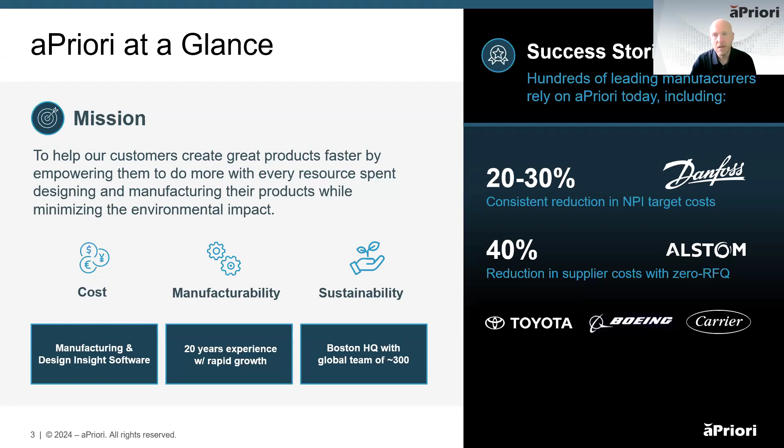Now, some of the top priorities in industrial manufacturing are where we can help as well. Inflation and margin pressure—we've felt it quite hard the last few years in terms of inflation globally, but margin pressure is still a big thing as well. That's something we can really help with by giving you a breakdown of where all the costs are coming from when it comes to your products.

Supply chain risk, obviously, with the geopolitical environment changing all the time, it can really lead to enhanced supply chain risk. So knowing where to look in different parts of the world—where is it profitable to do so, where is it reducing the risk—we can help with that kind of assessment as well.

Manufacturability skills are something that has been a concern for the industry for at least 15 years, really because 3D CAD is so easy to use these days. You can create any kind of shapes, not all of which are manufacturable. A recent study quoted in Forbes found that whilst the majority of students coming out of university and school are very well versed in 3D CAD, there's much fewer that are actually well prepared to make manufacturable design. So there's definitely a skills gap there, and our design guidance can help close that gap.

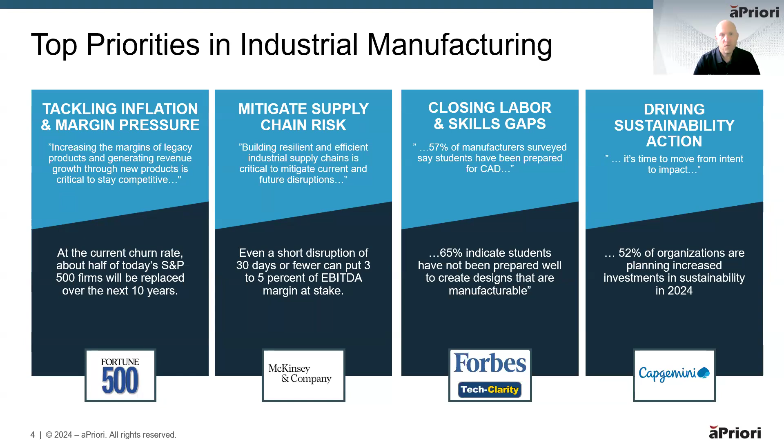So we kind of tackle all four of those top priorities, and the way we do it is by leveraging the investments you've already made in digital twin technology. A lot of companies have done a pretty nice job focusing on the digital twin of the product. The 3D CAD model is the basis, adding PMI and other metadata, storing it in the PLM system. It's the start of a digital thread. We might use that for some digital prototyping as well, using FEA and CFD and those things.

But where aPriori comes in, it's adjacent to simulation technology, but it's simulating the manufacturing process, and unlike other simulation technologies, we do it in seconds and minutes rather than hours and days. We really bring the digital twin of the manufacturing process within a manufacturing facility. So we bring two digital twins and run the digital twin of the product through the process twin and the factory twin. By doing that, the insights you get are the cost, the time to manufacture it, any potential manufacturability issues, but also the amount of carbon emissions as a result of those processes, all the way back to the raw material. So it can really help with your upstream scope 3 reporting requirements.

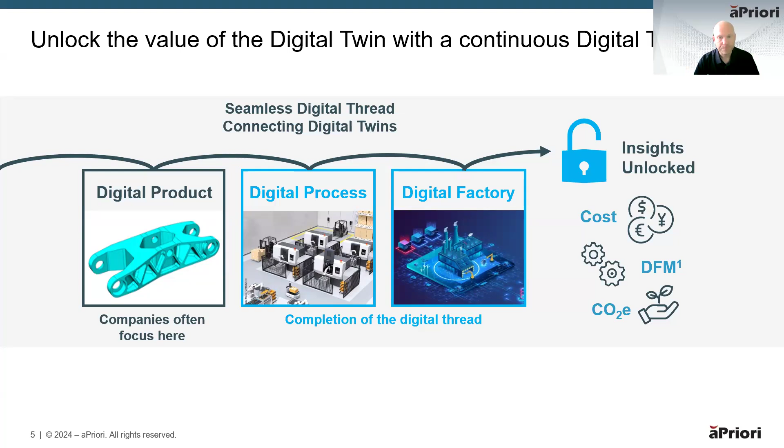So today we're going to be looking at the importance of sustainability when it comes to design and incorporating that, and some of the challenges. Then looking at how you can look to balance cost and carbon, because they're two very different units, really.

You know, how much is a kilogram of carbon emissions? What's the damage? What's the increase in risk to your business? What are the potential tax implications? How is it going to harm your bottom line? A customer is going to be put off by emitting extra carbon emissions than what you really need to. All these things come into the equation. So balancing cost and carbon is really a critical one to consider.

And then we've got a bunch of sustainable design case studies, and these can be really insightful - just some of the things you can start to play around with, some of the levers you can pull in order to improve the sustainability and the profitability of every design that you make. Being able to do that early during the design process is where it's most valuable. And then we'll summarize today's session.

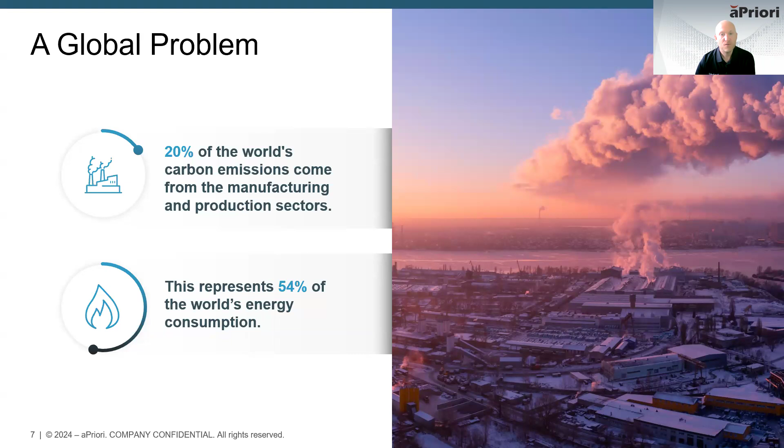So as we all know, it's really a global problem, climate change. 20% of the world's carbon emissions come from manufacturing and production sectors, and also 54% of the world's energy consumption. So manufacturers, our customers, are very much responsible for some of the climate change issue, but we also offer part of the solution as well. Engineers are going to be the ones that solve this issue, if we ever do, and I'm hopeful that we are.

So some of the challenges around design and sustainable design is really the lack of knowledge. If you look at two designs, intuitively you can probably say this one is more expensive than this one because maybe it looks more complex or the quality is better - you've got a good indication of what's more expensive usually, kind of intuitively. But if I was to show you two designs, it would be very difficult for you to kind of guess intuitively which one has a higher embodied carbon in it.

Then when it comes to business models, we're really focused on profitability as a business, and usually the way to increase profitability, increase revenue, is to sell more. Now, selling more doesn't necessarily mean that your carbon emissions are going to be less - usually it's the other way around. So our business models don't really work too well for sustainability. So we need to kind of look at balancing the books in a different way.

Then when it comes to the sustainability team, they're really focused on the reporting, making sure that everything that's been done is accounted for, much like a finance team. When it comes to design, they're not really too focused on the design and manufacturing phase. For the majority of people, the biggest environmental impact is when the product is being used. If the product uses any kind of energy during its lifetime, that is going to be the biggest proportion, and that's usually where the sustainability team want to focus, because that's where you start on the biggest area.

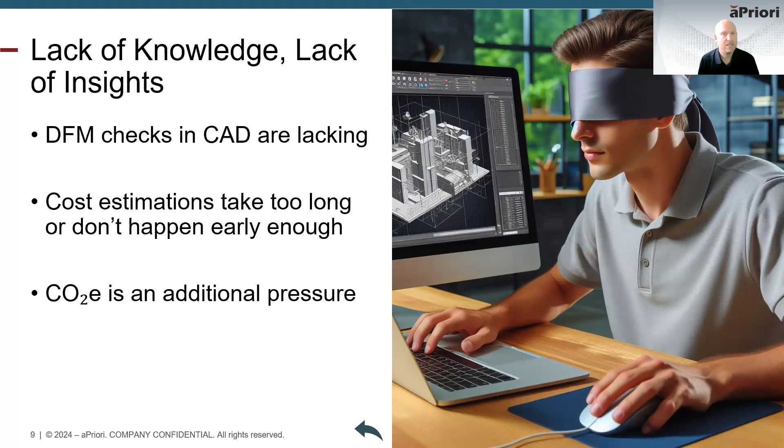So when it comes to business models, one thing we can do to address the balance is to apply an internal cost of carbon. Now, I spoke about this last week in the sustainable sourcing section, but if you are to quantify the cost of carbon by applying an internal carbon price, like many of the top 500 companies are doing, everything else kind of falls into line.

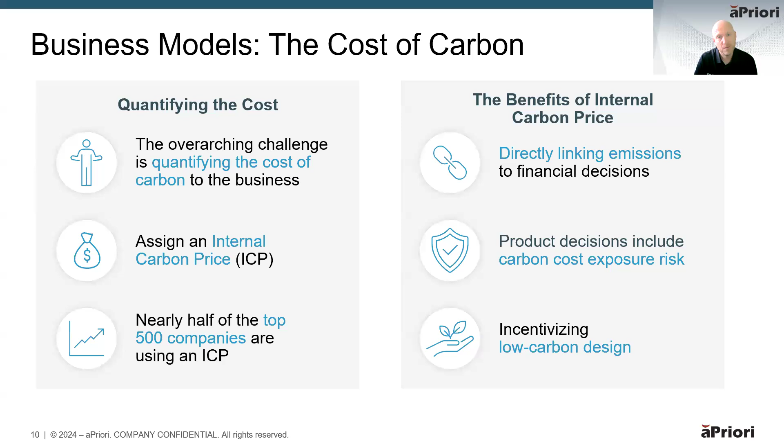What you're going to want, if you've got a cost of carbon, is a really accurate idea of how much carbon emissions you're putting out. And so you're going to want more insights, more accurate measurements. You're just going to really treat it as a cost that's potentially leaking out of the business. So if you do nothing else, just applying that internal cost of carbon and internal carbon price, that's going to give you a really good strategy for going forwards, because now everyone is just chasing cost, rather than how do we deal with carbon and cost separately or together.

And all of those things are really reliant on the customer, how the product's used, and having that closed loop to get the product back. That's definitely the hardest area to do anything about. The other thing is the in-use phase. If it's an electrified product, you've already kind of decarbonized it as much as possible if you've moved away from fossil fuels. So if you've gone to a synthetic fuel or a low carbon method of powering the product, you can kind of rely on the natural energy transition of the grid.

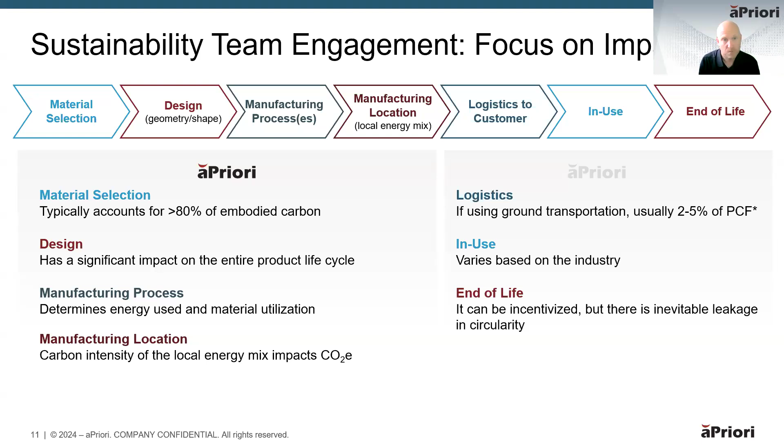They won't get bigger, but they'll be more significant as a whole. And what we found by talking to customers is there's really four levels of maturity. So the first place to start is creating a baseline. You need something to measure against.

A lot of customers choose where they were in 2019 and try to measure the products and corporate sustainability from that year, and they use that as a baseline. And they'll try to make any announcements based on that baseline. So if they're looking to halve their emissions, they'll do it based on that baseline figure. If they're looking to reach net zero, it'll be based on that figure.

Then the next place to start is sustainable sourcing, because you're not really having to change the design of the products. You're not having to change any real specifications. You can just look at a more sustainable supplier, one that uses more renewable energy, one that's in a lower carbon energy part of the world, like the Nordics, for instance. They use a lot of wind power, or Brazil, they use a lot of hydroelectricity. So anywhere that uses kind of lower carbon energy generation is a potential route to look for.

Then I call it sustainable cost engineering. It could be value engineering or just re-engineering, but taking an existing product and making it more sustainable. So looking at whether you can source some more recycled content. So when it comes to aluminium and steel, there's no real loss of performance with those materials when they're a higher recycled content. They're really 100% recyclable without any loss of performance. So swapping to a greener grade of those materials is quite an easy thing to do.

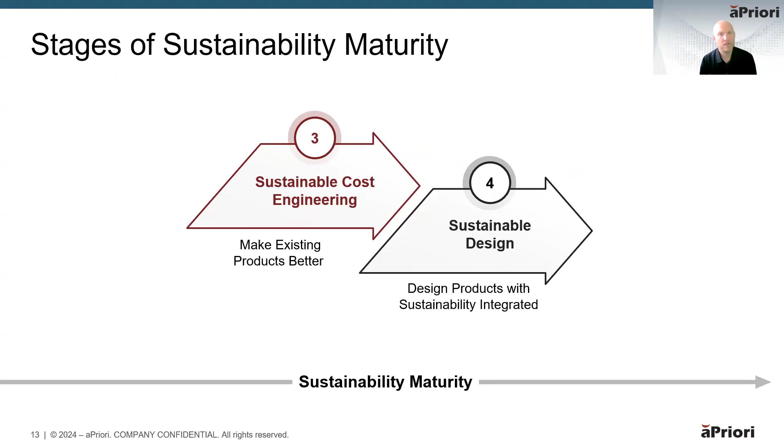And the most mature companies are really considering sustainability from the get-go, from design, and they're really considering everything else along the whole chain. So in terms of maturity, really starting at the end and working backwards. So today we're going to look at the more mature phases. So in last week's session, we looked at the first couple of stages. We're going to focus on tweaking existing products and starting from scratch.

And to do this, we're using the aPriori Manufacturing Insights platform. And what we do is take the 3D CAD model, we'll run it through a digital factory. That's really the only input that you need to make as a user. We run some automated analysis through our artificial intelligence engine and give you insights to review. And those insights allow you to take action on exactly what you need to take action on based on your requirements. So getting insights into the sustainability, profitability, and the manufacturability of that product gives you a really insightful position to make decisions around.

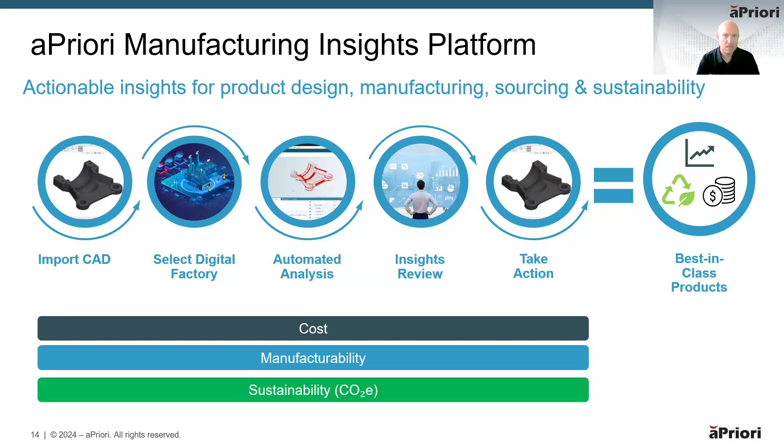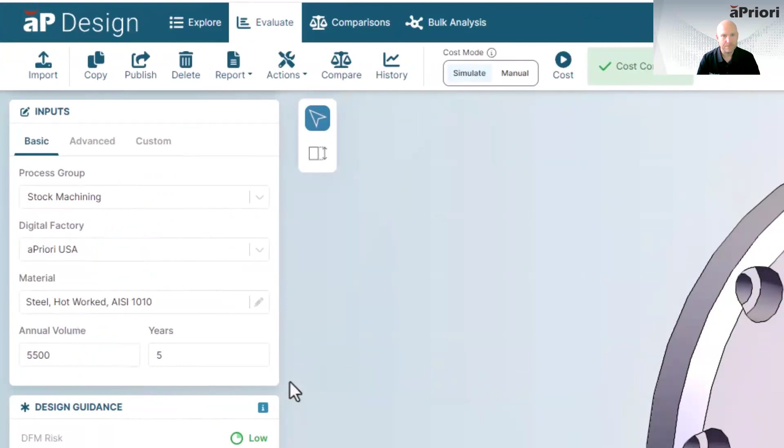If you are looking to join the rapidly expanding number of leading manufacturers using aPriori to improve their product profitability, sustainability, and manufacturability, you start by simply uploading your 3D CAD model into the Manufacturing Insights platform. After choosing from a list of manufacturing process groups, a digital factory, and an annual volume for production, you are ready to get insights into cost, carbon, and DFM. In seconds after a full manufacturing simulation, we get design guidance based on a combination of best practices and the specific capabilities of manufacturing facilities. This allows the design to be right the first time, accelerating your time to market, and reducing the back and forth so often required with suppliers.

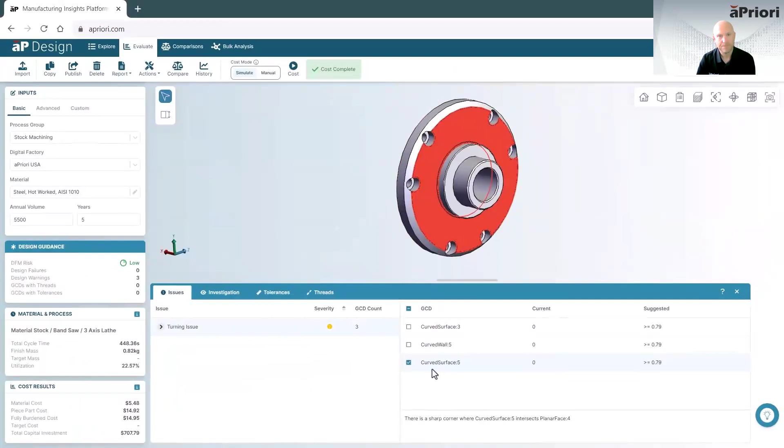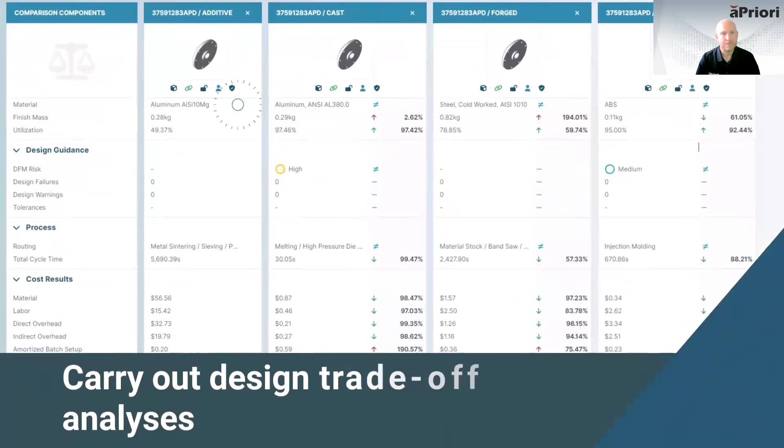We can also dive deeper and look at the time and cost of each operation, as well as a full breakdown of fully burdened cost, which can be used to drive further reductions during design or leveraged for fact-based negotiations downstream. We can then start to make data-driven decisions earlier in design by comparing different scenarios, altering the design, the material, the manufacturing process, or the chosen supplier or region. We can then take this to the next level of automation by leveraging aPriori's bulk analysis and upload a complete project of 3D CAD assemblies. Or go fully automated and integrate manufacturing insights into your PLM system.

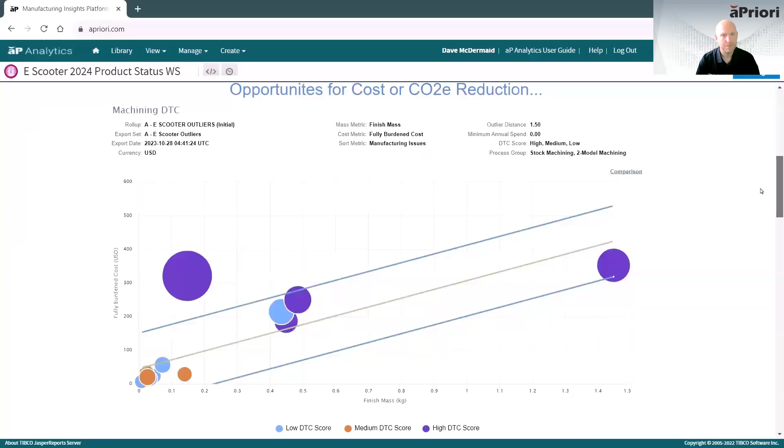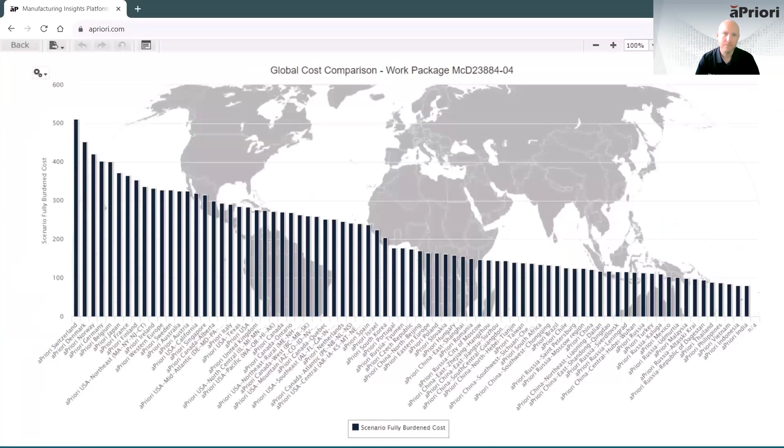Everything evaluated on the Manufacturing Insights platform can be viewed from a much higher level too. Using the inbuilt analytics, we can build dashboards and reports to help us identify opportunities for innovation, applying precious resources on the most impactful areas, reducing risks and focusing efforts. Or use the data for strategic sourcing decisions. On top of all that, scenarios can be shared with key project stakeholders, enabling in-context collaboration with full traceability. Removing the need to schedule time for experts to review designs, getting more profitable, sustainable, manufacturable designs to market faster than ever before.

So that's how it works. And it is a platform. So it's not just for one group of users. It's not just for a single silo. It can really be used across the product development cycle. So you can use it in one area, but it's really most powerful when you use it along the whole process.

So design engineers have a view. They can do things earlier on, start to make some reductions. Then it can go to a value engineer and they can take the data that's been generated from the design engineer and refine it, look at things to a much deeper level and do a really nice job of optimizing the manufacturing process.

Program managers can view the analytics from a high level and look at where to focus and look where the risks are and where the opportunities are. And then anybody else that has an influence or is a stakeholder in the product can review what's going on between all of those teams and make comments, all in context of 3D with those insights.

So we have a name for each kind of area. AP Design is what the designers use. AP Pro is what our experts use. AP Workspace is the collaboration tool. And AP Analytics is our business intelligence platform for creating dashboards and tracking products against cost and carbon. And then AP Generate is what links it to your PLM system.

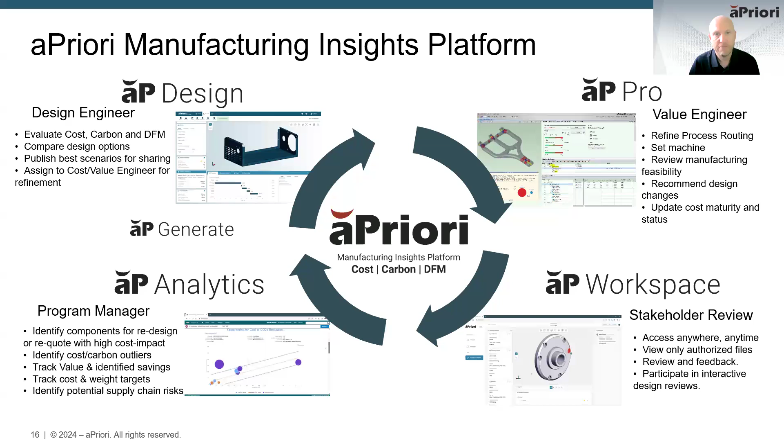Now, the product development process, we've probably all seen this before, but the earlier you start to make design changes, the more design freedom you have, the more options you've got available to you, and the lower the cost is. So as things progress to the right, the cost of any changes goes up, and you've also got less design freedom as well. So the blue line is the design freedom going down.

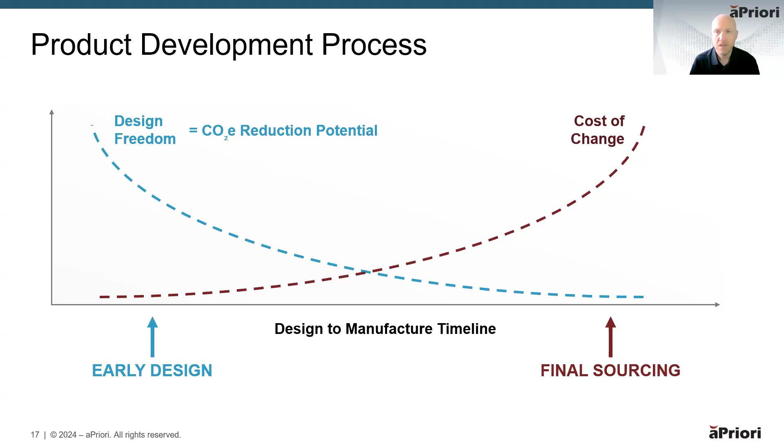That's also the same as carbon equivalent emission reduction potential. So those two things decrease in terms of opportunities, whilst the cost of any changes goes up. So we really want to make changes as early on as possible. So today's session is all about balancing cost and carbon. So what levers can we pull there?

So we've kind of touched on a few of them already, but it's everything the designer and product development team has influence over. So it's the geometry, it's the shape, it's the material, the manufacturing process, and potentially the location and the energy mix that's being used in that location.

So what I want to do is just run through a series of scenarios to show you what aPriori came up with, but also how every case is really different, and you can't really apply one rule for every single case. And we're going to make it a little bit interactive as well. So this scenario is part of a train. It's a customer example, and this is kind of one of their demonstration pieces. It's a welded assembly, so lots of sheet metal, formed sheet metal, then welded together into an assembly.

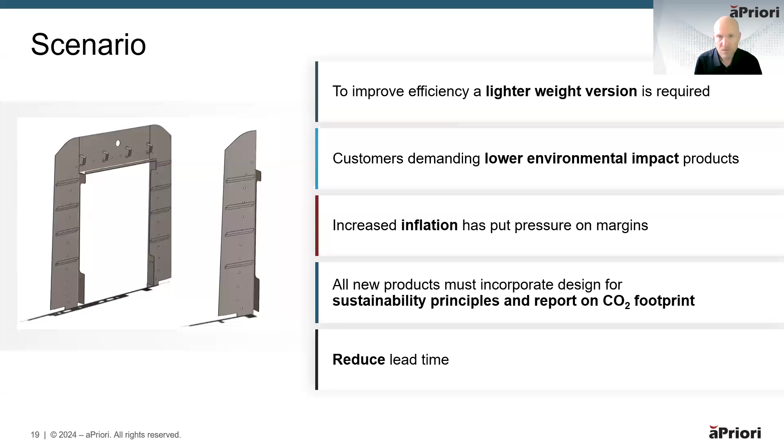And the scenario they gave us was to come up with a lighter weight version with lower environmental impact, potentially lower cost as well. And if you can, reduce the lead time. We don't want it to take longer to manufacture. So we looked at it and thought, oh, we can probably do some part consolidation on this. That was my design head going. So can we do it in one piece, simplify it a little bit? It might be less parts, but it could be more complex. So which do you think is going to be the lowest cost?

And this is when we're going to launch a poll question. So I've got two questions. What is going to be the lowest cost, and what is going to be the lowest carbon? So if we can launch those poll questions, out of the two, we've got left-hand side and right-hand side. So the one on the left is the assembly, the one on the right is the single part version. So Dennis, can you launch the poll?

Perfect, thank you. So which will be the lowest cost and which will be the lowest carbon? I just want to get an idea just to see how intuitive that kind of a question is. So if you were presented with these, imagine you're a design manager, you're being shown these two designs, you know the requirements are less cost, less carbon. Which one are you going to go for?

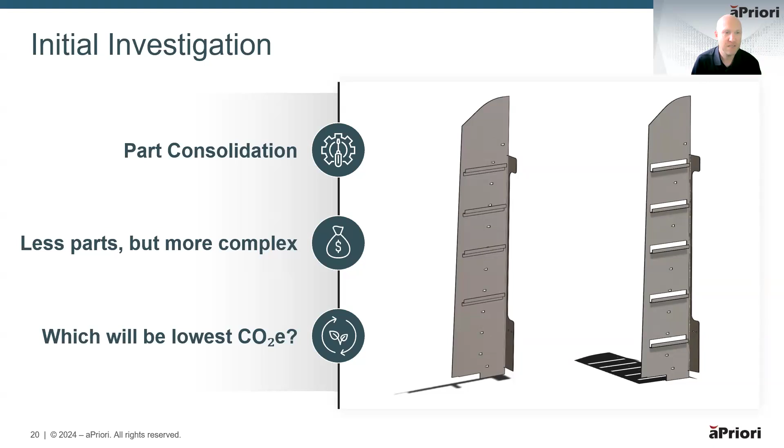And when we've got a few answers, we can take a look at the results. Okay, so both coming out with the single part on top, although a few people choosing the welded assembly as the lowest cost. So let's take a look. Thanks for launching that, Dennis. So this is exactly what we can find out.

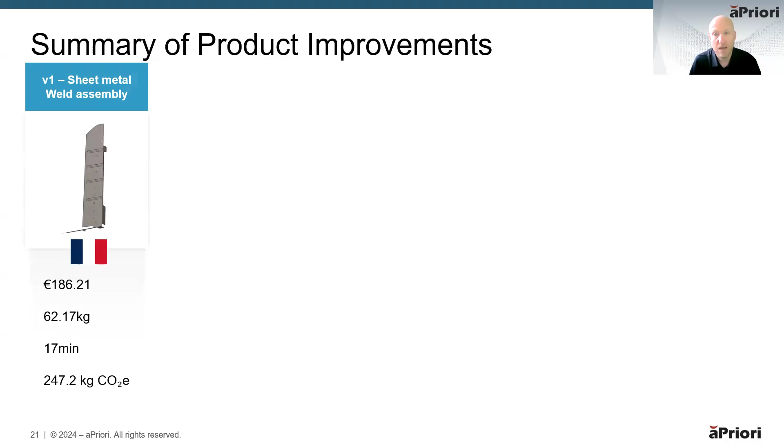So our baseline was our sheet metal welded assembly, and it came in around 186 euros, manufactured in France. The weight was 62 kilograms, and it took about 17 minutes to manufacture. So the welding and everything took about 17 minutes, and the carbon emissions was 247 kilograms for that one piece, or for that assembly. So the single part version came in at 161 euros.

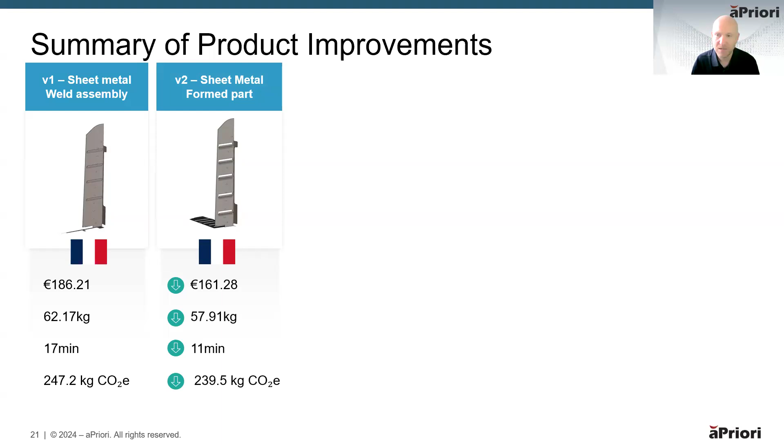So we made a saving there. We made a saving on the weight too. And it also brought the time down and the carbon. So if you said both carbon and cost were lower, you were correct. So then you can look a bit further.

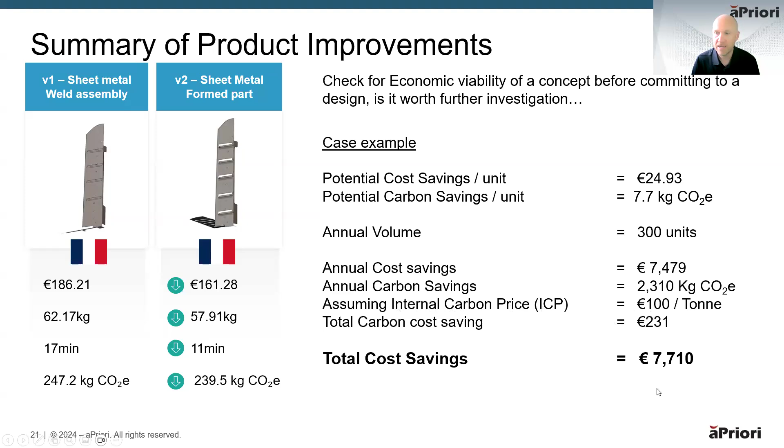We can look at the total cost savings if we were to roll this up into an annual amount. And just this one assembly consolidated into a part would save, based on an annual volume of just 300 units, around 7,000 euros. So pretty significant figure. And for our internal carbon price, we've got 100 euros per ton of carbon emissions, and that gets rolled into the cost savings.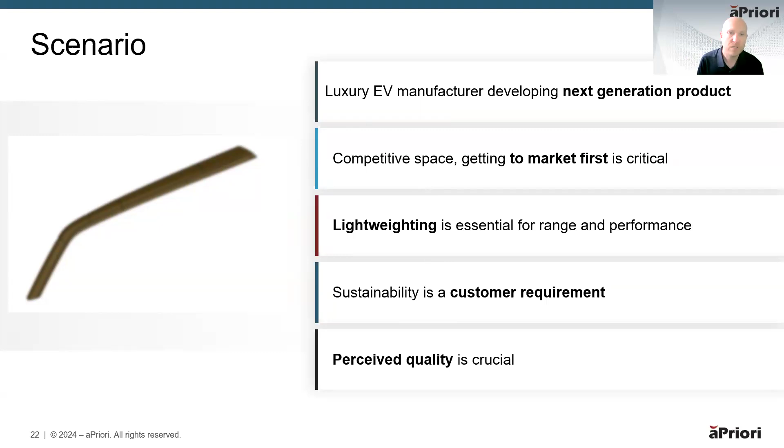So here's another question for you all. So we've gone from assembly to single part. We're going to do the opposite way around. So this is an automotive example. It's blurred out because it's a customer part. It's an EV manufacturer, similar kind of constraints really. Lightweighting is essential, but sustainability is also a customer requirement, and perceived quality is something we want to make sure we've got as well.

So this time we're going the other way. We're looking at splitting this part into more than one piece, because this is about 3 meters long. So it's a very long piece of trim. It's injection molded, so you're going to need a big machine. So if we create it out of more parts, but smaller parts, which one's going to be the lowest cost and which one's going to be the lowest carbon?

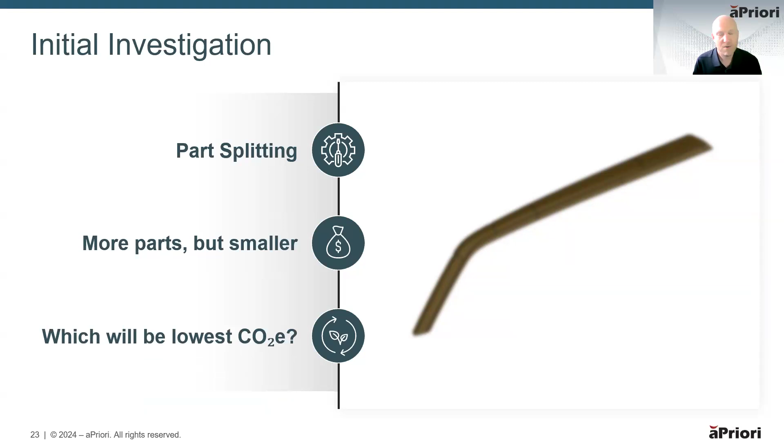However, it gets more complex here because it's not just one piece or two piece. We can cut this into as many pieces as we want. So if we can launch the second poll, we've got a few more options to choose from. Do we want to make this in 2 parts, 3 parts, 4 parts, or one big part? So we've got a lot more to consider, for both cost and carbon. So if you could just launch this second poll question there, Dennis, and we'll see what people's response is to that one.

So the last one was fairly simple, but as we progress, we're becoming more realistic with our design challenges. We have more options available to us as a designer and manufacturer. So we've got more freedom to do things, and it definitely makes the decision making more critical, but also more complex. So let's see what the result is here.

Wonder if any of you are abstaining from voting because it's too complex.

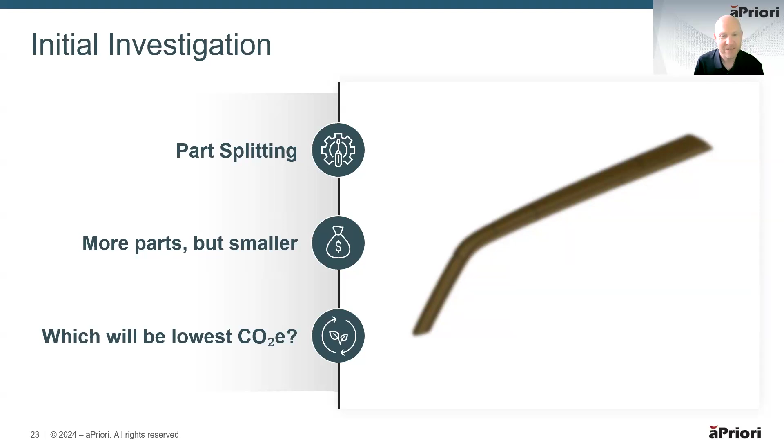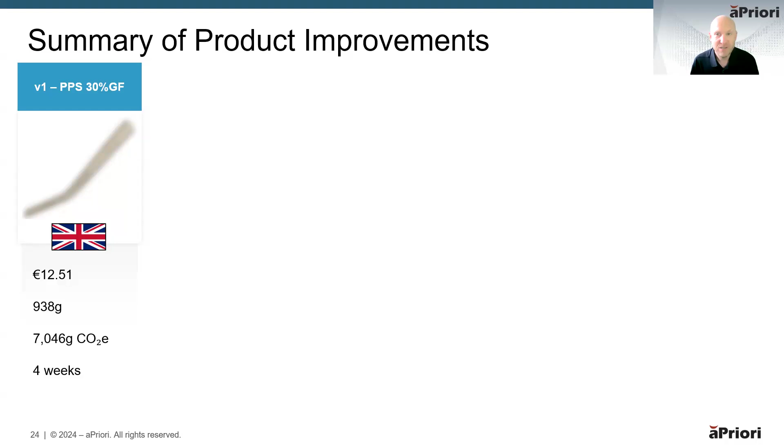So we did do it for all of the versions, but I don't have the answers for all of the versions. But the first one, it was a 30% glass-filled polymer. The 3-meter version was 12 euros 51, came in just under a kilogram, and 7 kilos of carbon emissions. And it took about 4 weeks, manufactured in the UK. So we tried 2 pieces, 3 pieces, 4 pieces. The best option was 3 pieces.

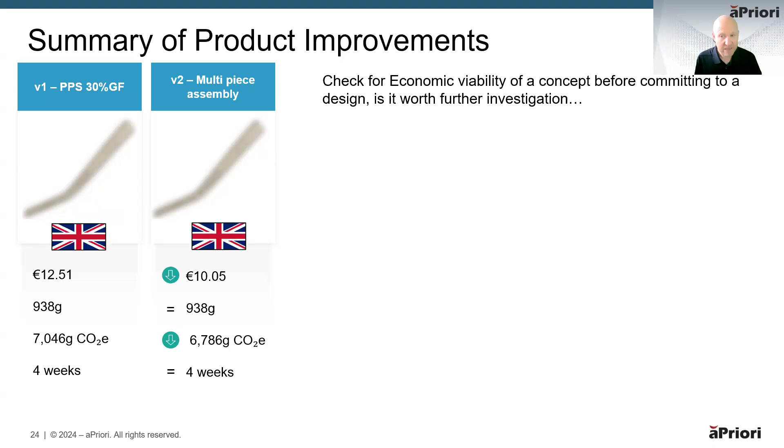And the reason for that is there are not many machines that can take a 3-meter long part. So the clamp force of the machine went up, and therefore it was a much bigger machine, and the energy use during that injection molding process went up as well. So by splitting it into 3, we can do a multi-cavity tool and get it on a much lower clamp force and get everything done at the same time. So the weight is the same because we just split it into pieces, but we made a fairly significant saving based on the volume.

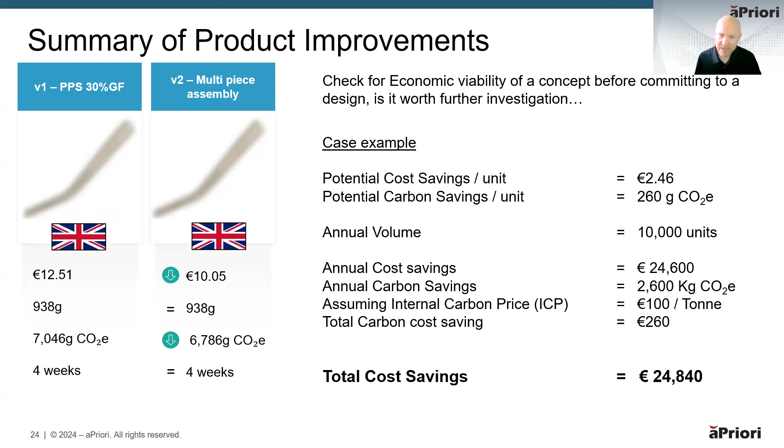So assuming 10,000 units of the whole thing, we saved 24,000 euros. So you can see part consolidation is not always the answer. Splitting parts is not always the answer. So the next scenario really gives us a different approach altogether.

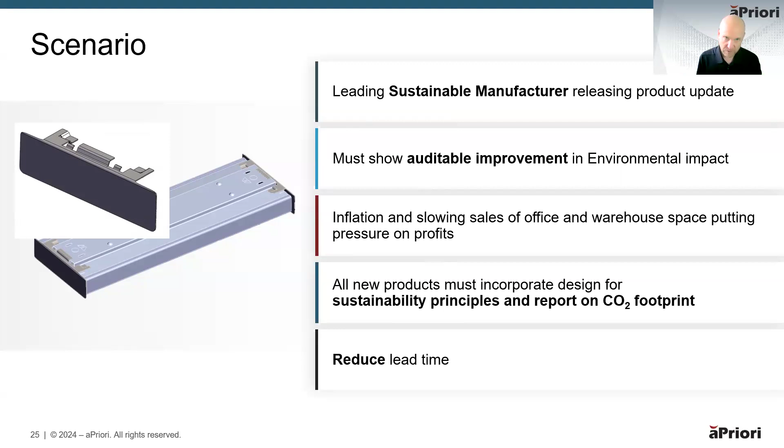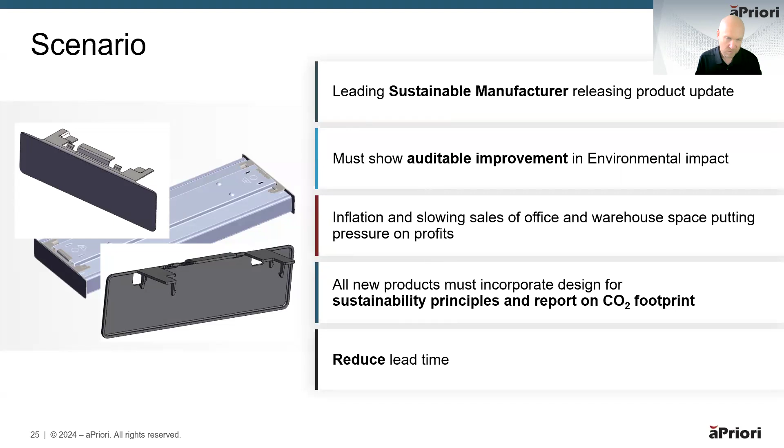So we redesigned it as a plastic injection molded version. So we tried to do a 2-piece tool design with some clips in there. We probably need to make it quite a springy polymer to make it somewhat similar to the sheet metal version. So I haven't asked any questions on this one because it's a bit more complex and we've got a few more options to run through.

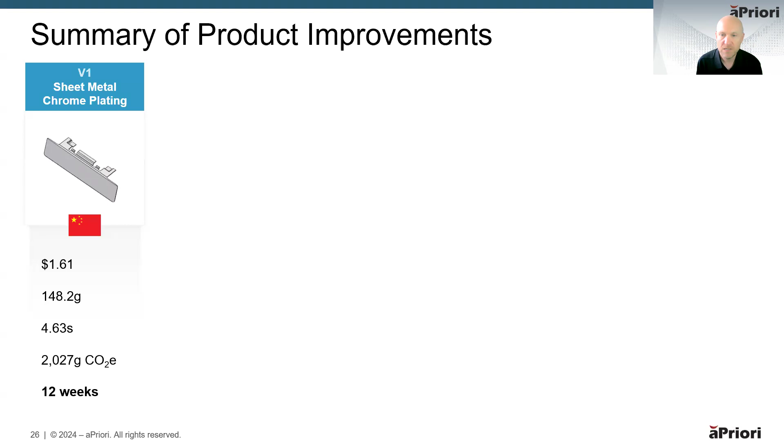So we started out with a sheet metal version with some chrome plating on there because it's a decorative piece. It's going to be on someone's ceiling. We want it to look nice. We were getting it made in China at a cost of around $1.61. The weight we don't really care too much about because it's just sat on someone's ceiling, but it took 4.63 seconds to manufacture and 2 kilograms of carbon.

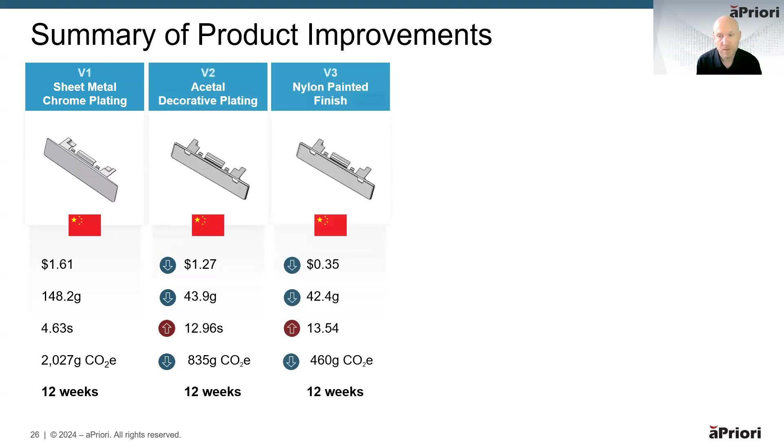Changing that to an acetal with chrome plating on did reduce the cost, but the time to produce them went up. So the injection molding process for 1 at a time went up compared to the sheet metal process. Then we tried a nylon. Now the nylon brought the price down. Bear with me 1 second, it's animating by itself.

Nylon brought the cost down and the carbon down, but the thing was, we would have to paint to get the finish that we were after, because you can't chrome plate nylon, and that's something that aPriori actually flagged for us. It said it wouldn't be compatible because of the material. So the time went up slightly, but everything else came down. But the fact we would have to paint it meant we kind of scratched that off the list.

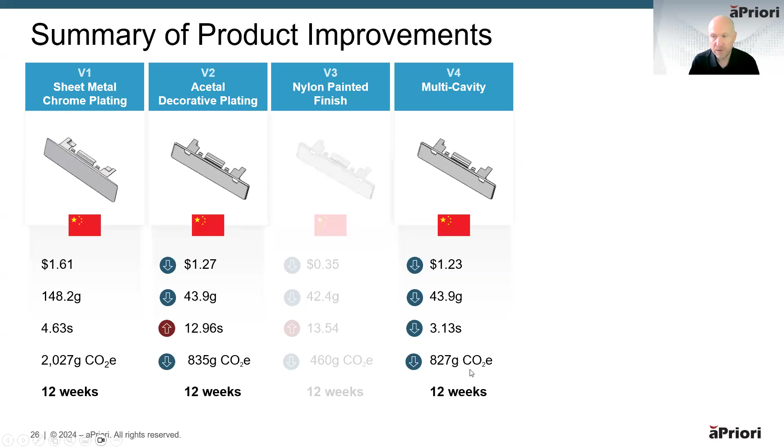So the other option to get the time down is to look at a multi-cavity tool. So if we were to put 4 in at the same time, we can actually get the time down by 4 equivalent, because it will still take 12.96 seconds, but because we're making 4 at a time, the equivalent is 3 per part. That's going to bring our carbon emissions down further per part, and then we can look at different regions to actually manufacture it.

And this is where the internal carbon price is really useful, because Sweden, Spain and Poland, you can see we've got very different pricing across all of those, but we've also got very different carbon emissions as well. So how do we decide that 800 grams of carbon equivalent emissions and $1.41 is better than half the carbon and double the price? How do you balance those two, or a slightly higher price and another half of the carbon amount? So it's really difficult to make those decisions unless you've got a value for the carbon.

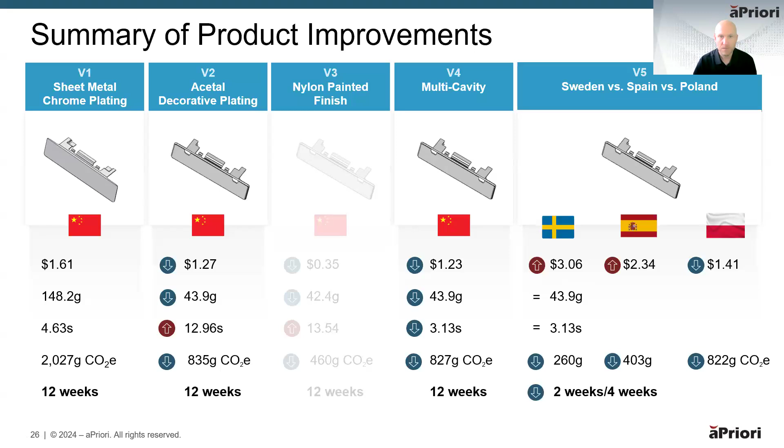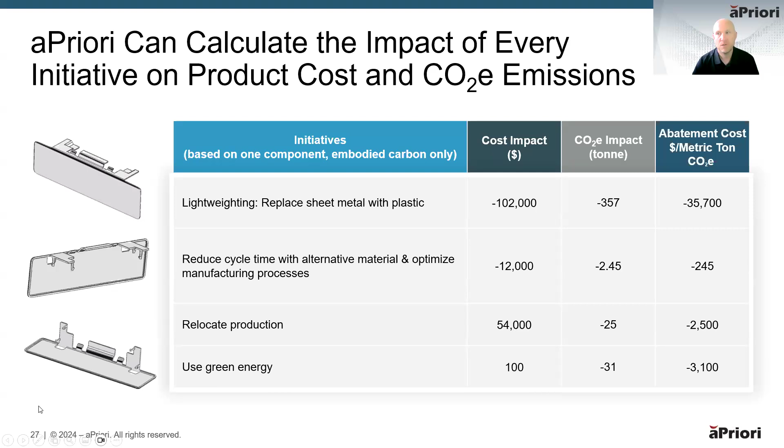And once you've done that, you can also start to calculate the financial impact of all of these decisions together. So you can see every phase we've gone through is essentially an initiative. It might be a design phase, it could just be a design iteration, but you can quantify the impact that each one has. So you can see by replacing the sheet metal with plastic, we've saved around $100,000, reducing the cycle time saves around 12,000, relocating production 54,000, and green energy around $100. So you can actually start to quantify each initiative. So the return on investment is really nice and clear based on each one.

And then I've got one last case study to run through, and this is just looking at pure design changes. So just looking really at the shape. We know that design for manufacturability is a huge contributor towards cost. That also applies for carbon. So what can we do as a pure CAD design engineer? What can we really change? Well, we can change the material, how it's manufactured, and the shape. So we're going to look at that and see how it progresses.

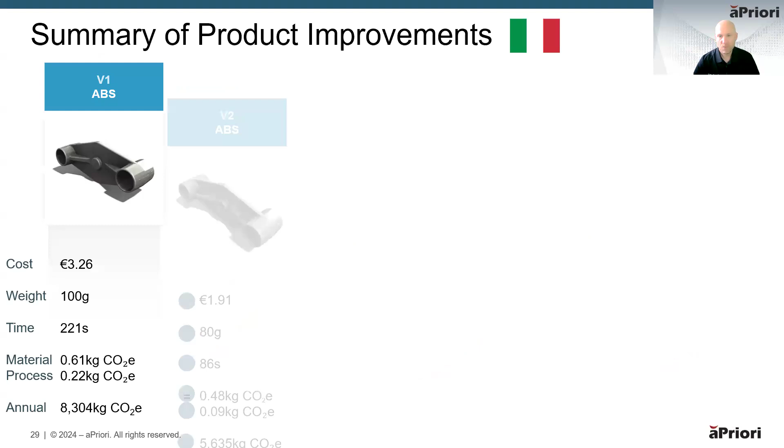So our first version, I'm going to choose an ABS, an all-round engineering plastic. Run it through aPriori, we get a cost, we get a weight, we get a time, we've got material and process carbon, and then an annual carbon.

So then what we've done is change the geometry very slightly. We've got a second version where we've thinned the walls out, we've put a shell in there to make it a little bit easier to manufacture.

It's reduced the cost a great deal, it's reduced the weight by about 20%, the cycle time has gone down, as you might expect with the thinner walls, and the process and material carbon's gone down as well as the

annual carbon. Then we can change the geometry again to a third version where we've tweaked it and looked at other design for manufacturability issues. The weight's around the same, the cycle times come down, and it's brought all of the carbon down significantly.

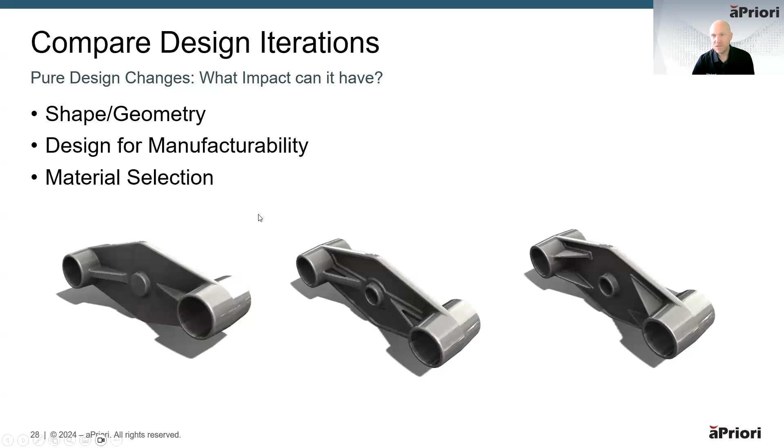So just by changing the geometry, we've actually pretty much halved our carbon and our cost. And all we've done is change the geometry, we haven't changed the process or the material. Because we're with Enginsoft today, we're manufacturing everything in Italy.

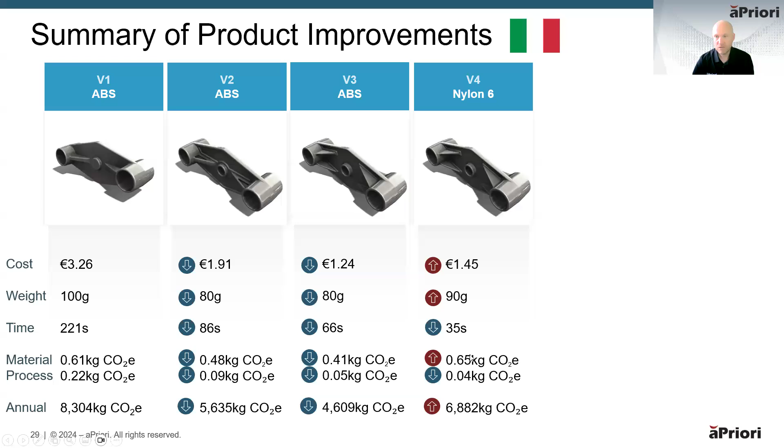So then we can look at different materials, same design for different materials. You can see the weight's gone up, the cost's gone up, the material carbon's gone up, but the process carbon's gone down. Because the cycle time's faster, the process carbon's gone down, but overall the annual carbon's gone up. So nylon 6 may not be the best for this design.

If we go to an acetal, the cost's gone down, the weight's gone up by 10% from the original. The cycle time's around the same as nylon, but everything else has gone down. And then the last version, if we choose a PBT, we can actually get the optimum result for this at 86 euro cents and our lowest carbon figure yet.

So just by changing the geometry, we've made a 44% saving on carbon, 62% saving on cost. If we change the geometry and the material, we've ended up with a 56% carbon saving and a 74% saving on cost.

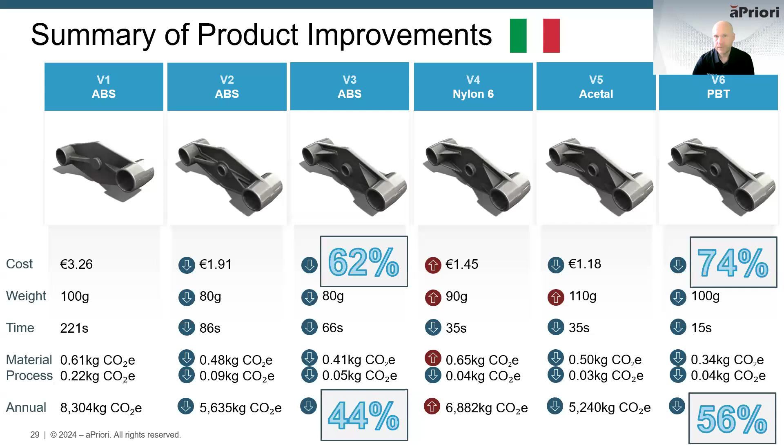So hopefully that shows you that balancing cost and carbon is possible. A more sustainable design doesn't have to be a more expensive design. And apriori is just a great co-pilot for helping you make those decisions.

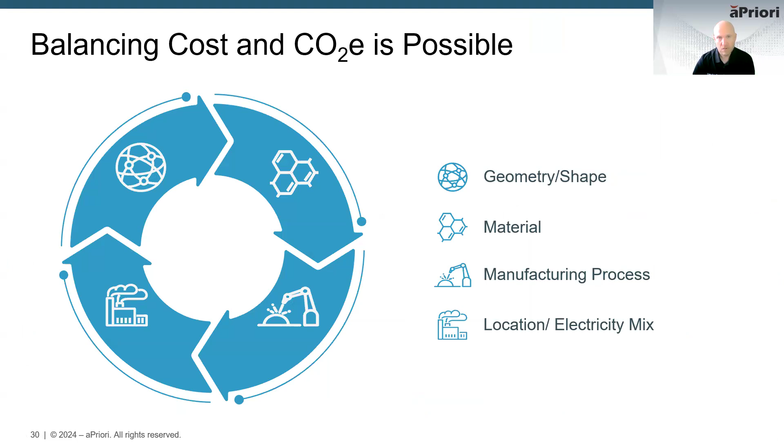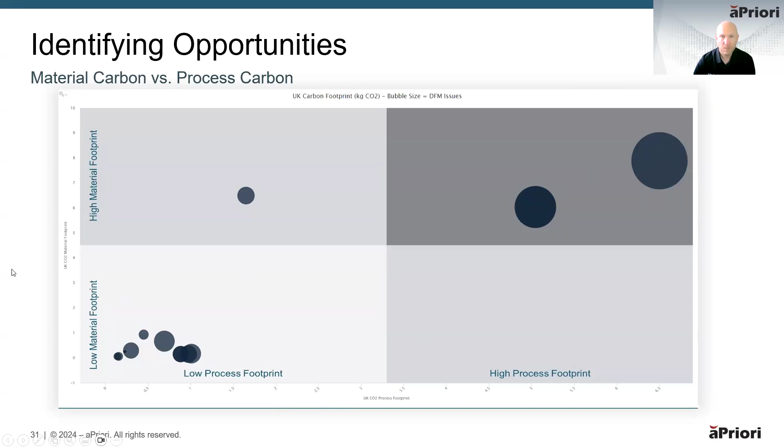Beyond that, using our analytics, you can identify opportunities. So everything you run through apriori goes into our analytics engine, where we can start to identify particular parts that have got high material footprints or low process and low material footprints, or where should you focus? It's probably going to be on these components, and then work your way down.

So sustainability with apriori, it's much faster and much more precise than any other method because we're using the 3D geometry and simulating the manufacturing process really precisely. And we give you actionable insights so you can make trade-offs between cost and carbon, but ensure you've got manufacturability.

And all of the calculations used to come up with these results are transparent, they're configurable, and they're proven. As you saw with the customers at the beginning, they're really basing their business on the results that come out of apriori.

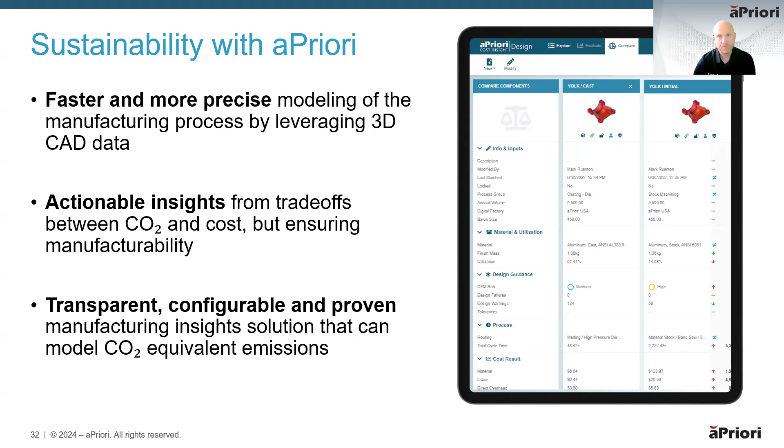So just to summarize today's session, we really help to plug that lack of knowledge by giving you insights all the way through the product development process. And we calculate it from a bottom-up, very detailed carbon assessment.

Business model, we really can automate the whole process, so it reduces demand on any internal resources and tries to spread the knowledge and gives people access through our collaboration tool of AP Workspace.

The sustainability team can then focus on where they're strongest. They can also be involved as one of the stakeholders through our collaboration tools. But it really takes the design and manufacturing off their hands, and the data that's in apriori goes straight

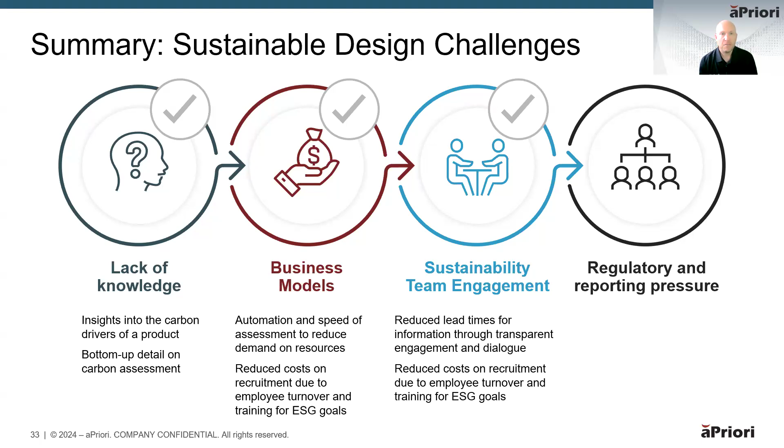to the design and sourcing teams, and allows them to focus on the regulation and reporting pressures that they've got, and they can obviously leverage all of the calculations that come straight out of apriori.

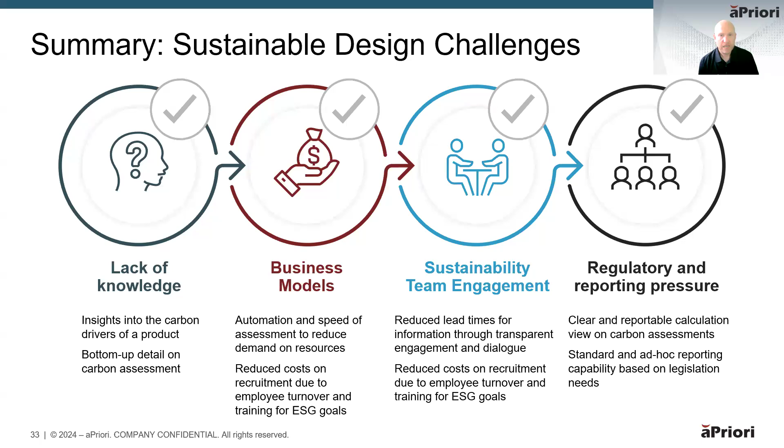So that brings me to the end of today's session, but I'm more than happy to answer any questions.